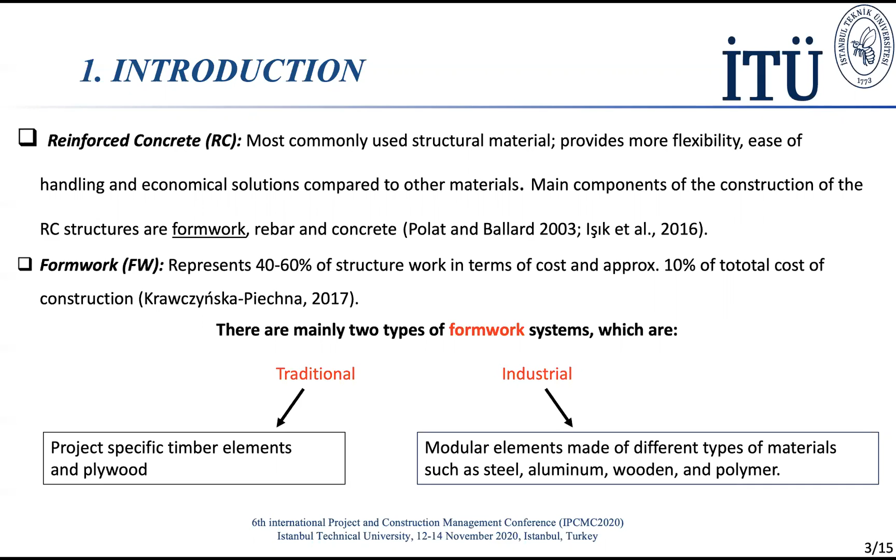I can say that traditional formwork is project-specific, therefore most of the materials in traditional formwork cannot be used in other projects, whereas industrial systems are modular and standardized elements, and they can be modified and changed so they can be used in other projects.

In our previous paper, we did a similar approach, and we analyzed the supply chains of traditional formwork and industrial formworks and compared them to each other with value stream mapping. It was found that traditional formwork has a high lead time and time waste, whereas industrial formwork systems reduce waste and lead time, eliminate unnecessary material movements, and also improve inventory management and a well-organized working environment.

The main stakeholders in the industrial formwork supply chain are the engineer, contractor, and the formwork fabricator. The engineer does the structural design of the building, the contractor performs the construction activities, and the formwork fabricator produces. But there are also other activities where you will see the roles and responsibilities can change.

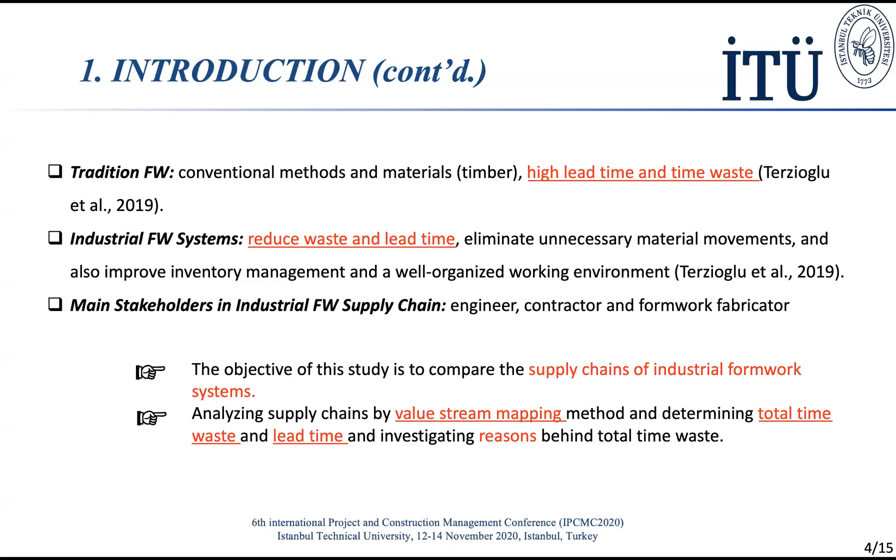The objectives of this study are to compare the supply chains of industrial formwork systems, and second, analyzing the supply chains by value stream mapping method and determining the total waste and lead time, and investigating reasons behind total time waste.

In order to determine the supply chain configurations used for industrial formwork systems in the Turkish reinforced construction industry, field studies were conducted by meeting practitioners and companies involved in the industrial formwork supply chain, and the data collected from these processes were analyzed using the value stream mapping method.

As you see here, these are process maps, and process maps identify the different roles and responsibilities of stakeholders in the supply chain processes. It was found through our analysis that there are three different supply chain configurations, therefore three different process maps widely used for the industrial formwork systems.

This is the first one, configuration 1. In configuration 1, the contractor determines the formwork alternatives, selects the most suitable formwork alternative, and determines the initial quantities of the selected formwork to prepare the project schedule. In this configuration, the contractor and its technical team must have knowledge and professional experience with the industrial formwork systems and the local formwork markets.

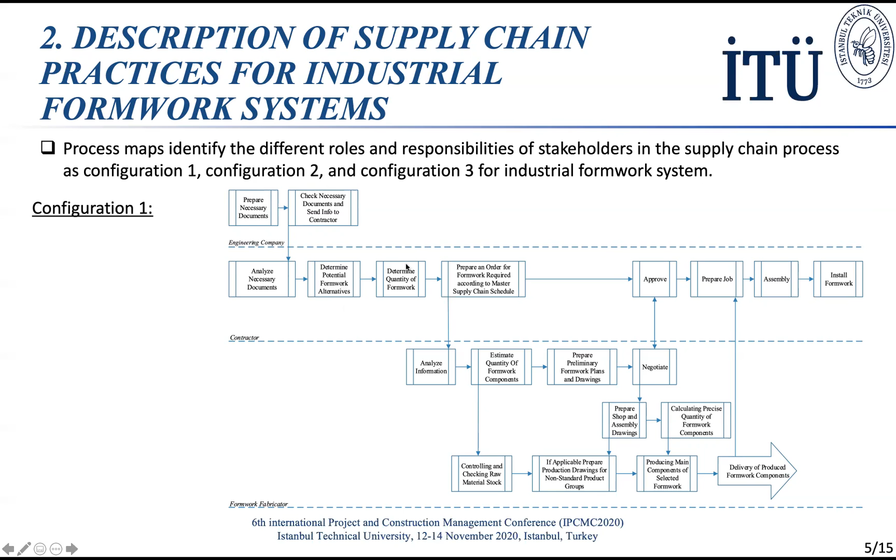You can see here that most activities for formwork in the design phase is done by the contractor. In configuration 2, the formwork fabricator performs the design, scheduling, determination of the initial formwork quantities, detailing, and fabricating activities.

The fabricator is regarded as an expert in the design and detailing of the formwork. The fabricator is accustomed to working with many contractors on different types of projects, and thus often has the experience needed to deal with the complexities of the project. The fabricator provides information to the contractors on which alternative formwork systems are appropriate for their projects.

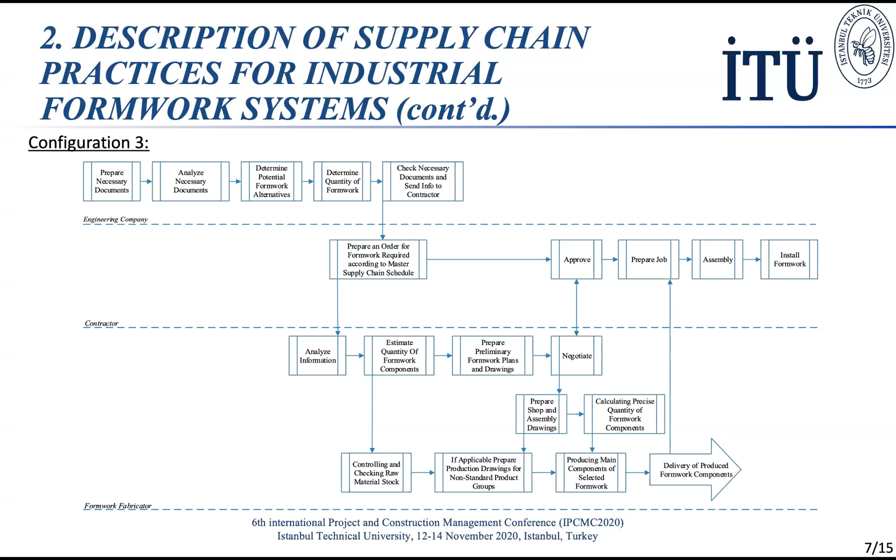In configuration 3, here you see that the engineer performs the design activities for formwork, and also does the scheduling and determination of the initial formwork quantities. In this configuration, the engineer must have the necessary experience, expertise in formwork systems, and in-house technical capacity in the formwork field, other than doing the structural design of the building.

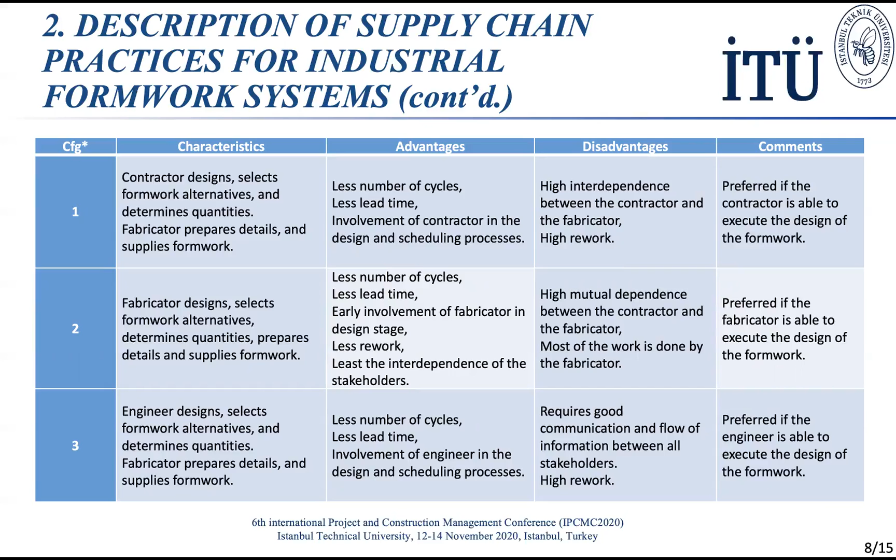In the slide, you can see the advantages, disadvantages, and preferences of each configuration. To summarize: the first configuration is preferred if the contractor is able to execute the design of the formwork. Configuration 2 is preferred if the fabricator is able to execute the design. And configuration 3 is preferred if the engineer is able to execute the design.

In our case study, it was a building project in Istanbul, and all 3 configurations were analyzed by separate orders. The formwork quantity used in this case study was a 500 square meter wall formwork.

In these tables, you can see the lead times, the value added times, and the wasted times and delays: design of the structural framing, designing of the formwork, preparing a request, detailing formwork, producing components, delivering goods to site, and assembly formwork, preparing job. Each time was recorded and the total wasted time was calculated.

As you can see, in configuration 1, the wasted time is 49%, which is very high.

Configuration 2, as you remember, is where the fabricator was involved early at the very beginning with the contractor and the engineer. And therefore, as you can see here, the wasted time is only 28% of the lead time. It is greatly reduced.

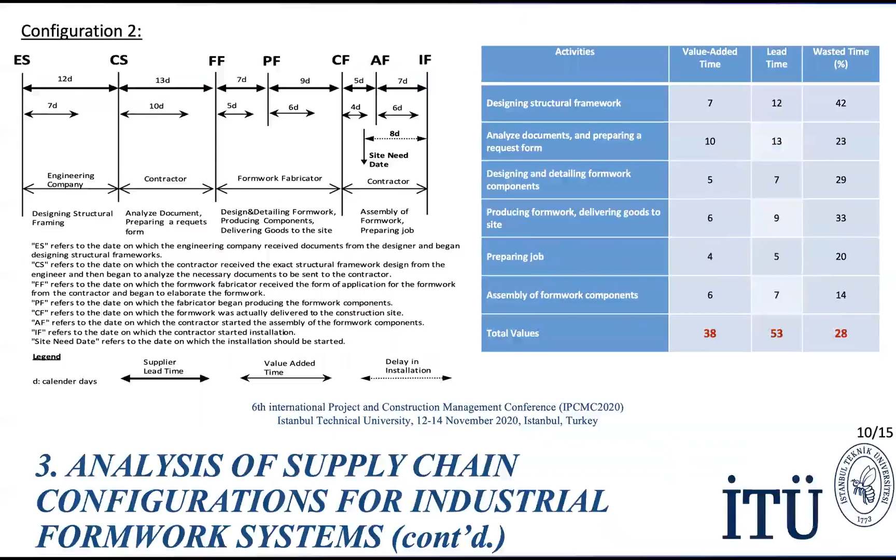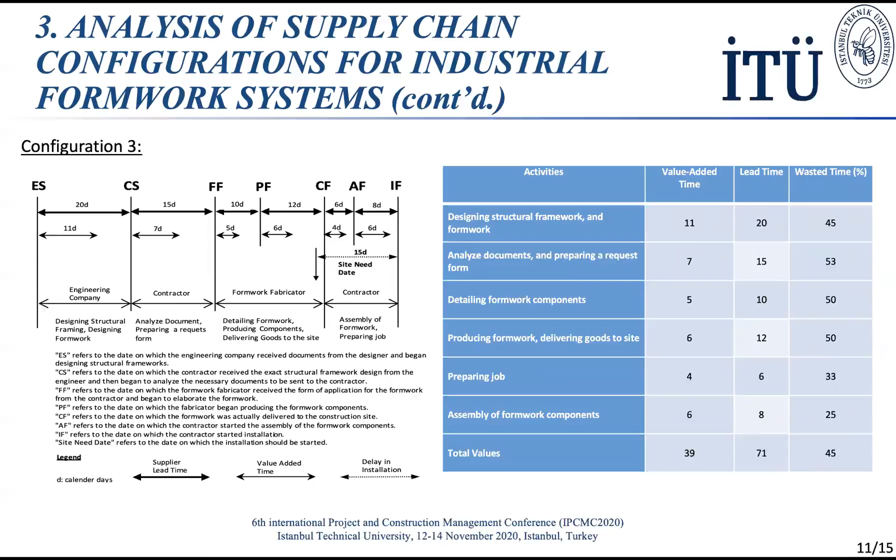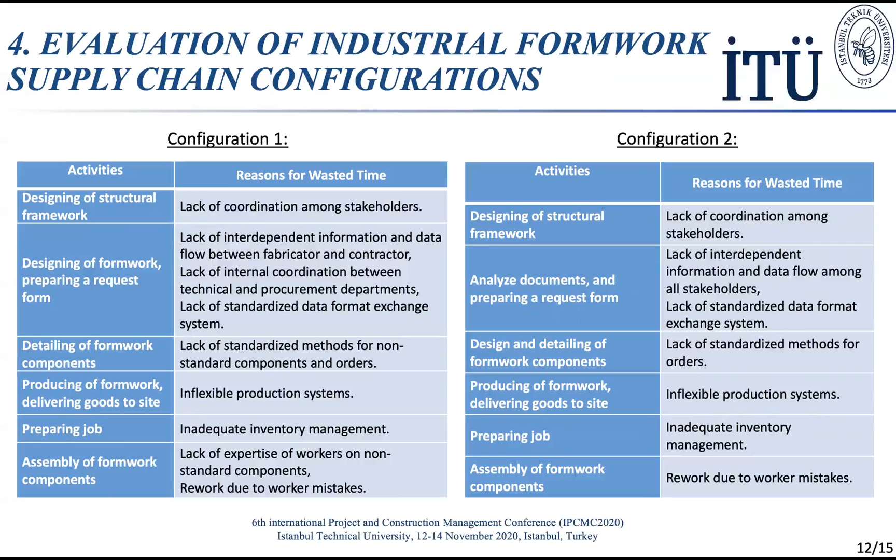We have also identified the reasons for wasted time for each configuration. In general, lack of coordination among stakeholders, lack of interdependent information and data flow, lack of standardized methods for orders, inflexible production systems, inadequate inventory management, and rework due to worker mistakes are the most common reasons for wasted time.

In summary, supply chain configuration 1 has a total waste of 49%, supply chain configuration 2 has 28%, and supply chain configuration 3 has 45%. Total waste percentage in configuration 2 is lower than the total waste percentages of both 1 and 3.

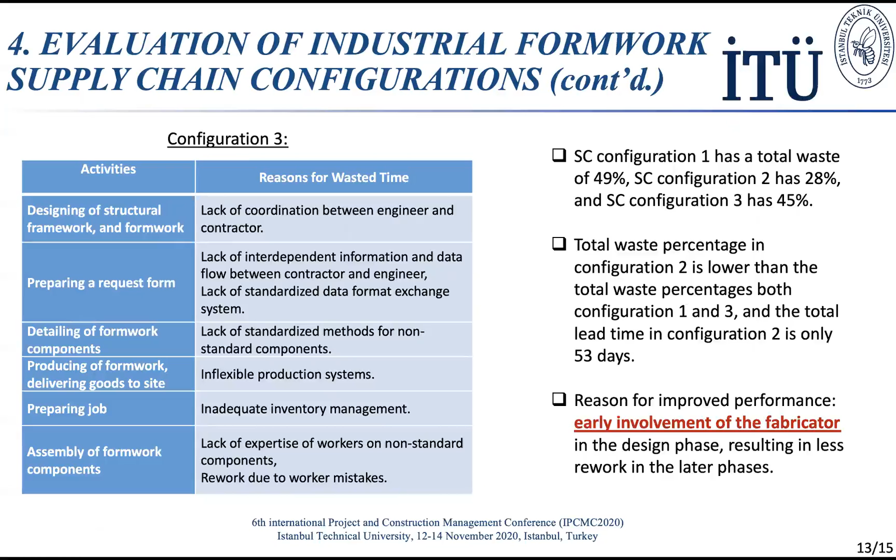The total lead time in configuration 2 is only 53 days. The reasons for this improved performance in configuration 2 is the early involvement of the fabricator in the design phase, resulting in less rework in later phases and less waste.

Our conclusion is that industrial formwork supply chain configurations where the formwork fabricator was involved early with the engineer and the contractor at the design phase of the project had higher performance than other supply chain configurations. Expertise of the fabricator is important and effective in the performance of industrial formwork supply chain and is required in the design, detailing, and production of the formwork solutions.

Waste can be further reduced by implementing standardized information flow, standardized solutions for non-standard problems, accurate data transfer, flexible production systems, effective inventory management, and better coordination among stakeholders.

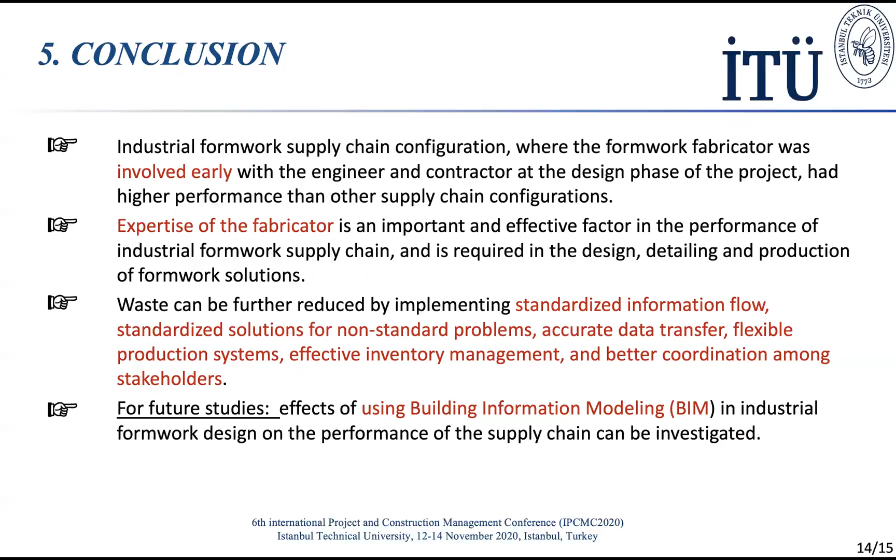For future studies, the effects of using building information modeling, BIM, in industrial formwork design on the performance of the supply chain can be investigated. Thank you for listening to me.